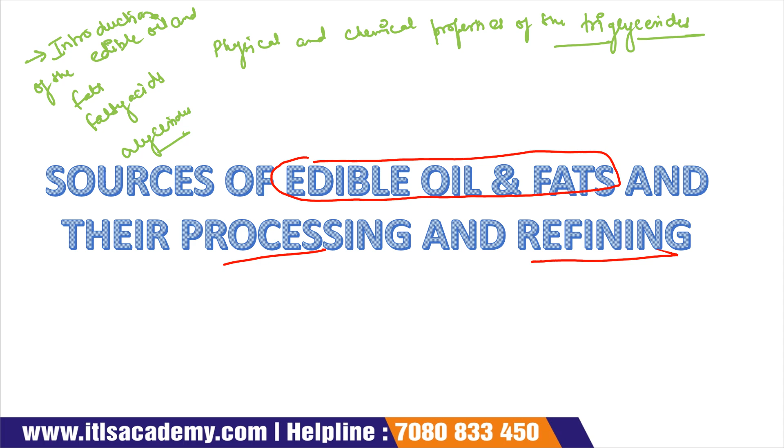Now in today's lecture, what are we going to do? We are going to see the sources of edible oil and fats, how we process this edible oil, and how we refine this edible oil and fat. All these things will be discussed in today's lecture. So let's start.

The first topic is sources of edible oil and fats. We all know that we get fat and oil from hundreds of plants and animals, and they can produce sufficient quantities of edible oil, but there are only a few sources which are commercially significant.

We will discuss a table which summarizes the major sources and different methods of processing edible oil and fat in different areas of the world. In table 4.8, all these things are summarized.

Several hundred plants and animals produce fats and oils in sufficient quantities to warrant processing into edible oil. However, only a few sources are commercially significant. There are several methods of producing this oil and fat, but among them only a few sources are commercially significant. In the next slide, there is a table which summarizes the major sources in the world and their methods of processing.

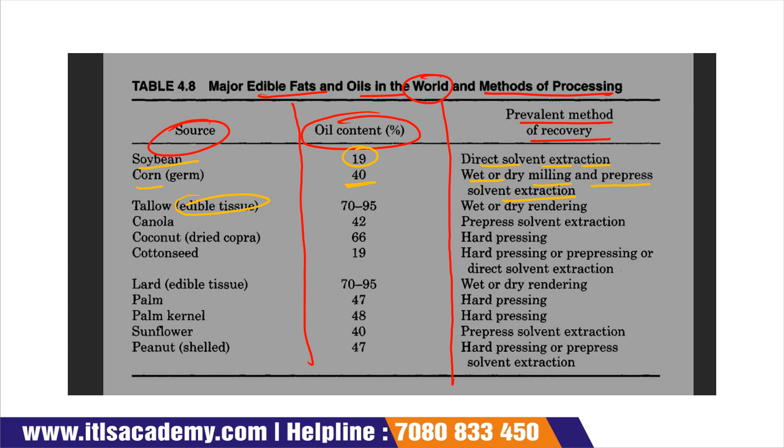The next source is tallow, which is edible tissue. It contains around 70 to 95% oil and can be recovered by the method called wet or dry rendering.

The next source is canola, which contains around 42% fat and can be recovered by the method called pre-press solvent extraction.

Next source is coconut, that is dried copra. It contains around 66% oil and can be recovered by the method called hard pressing. Next is cotton seed, which contains around 19% oil and can be recovered by hard pressing, pre-pressing, or direct solvent extraction.

The next source is lard, that is edible tissue. It contains around 70 to 95% oil and can be recovered by wet or dry rendering. Next source is palm, which contains around 47% oil and can be recovered by the method called hard pressing.

Next is palm kernel, which contains around 48% oil content and can be recovered by the method called hard pressing.

Next source is your sunflower, which contains around 40% oil and can be prepared by the pre-press solvent extraction method. Last source is your peanut, which contains around 47% oil and can be recovered by hard pressing or pre-press solvent extraction. So these are the major sources, their methods of processing, and the oil content present in them.

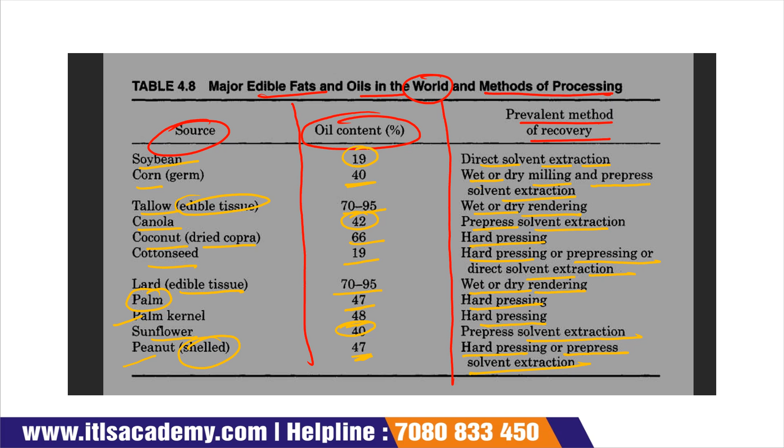It can be described in a summary. Now the next is world oilseed production. If we take data from 2003, world oilseed production is around 335.9 million tons. There is also a figure in the next slide, figure 4.2, which shows world production of different oil seeds.

Soybean constitutes the largest share, that is 56%, and the United States is the main crop grower. Malaysia mainly grows palm. The Philippines grow coconut, so coconut is the main oil source in the Philippines. China, Europe, India, and Canada grow rapeseed for oil production. Sunflower is grown in the United States, Australia, Europe, and Argentina, and the cottonseed market is dominated by the United States, China, Pakistan, India, and the former Soviet Union.

Now the next is world vegetable oil consumption. The previous one was oilseed production; now this is vegetable oil consumption. World vegetable oil consumption in 2003 was around 87.2 million tons. US consumption was about 9.91 million tons, and in the US market, animal fat such as tallow or lard has a relatively small share, only around 2%, compared to vegetable oil.

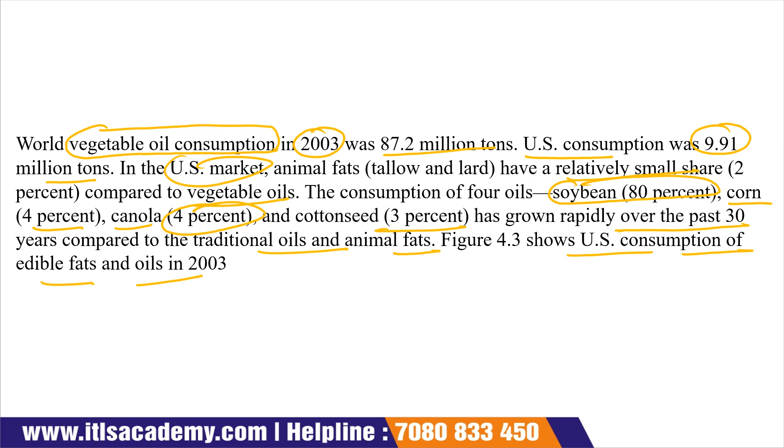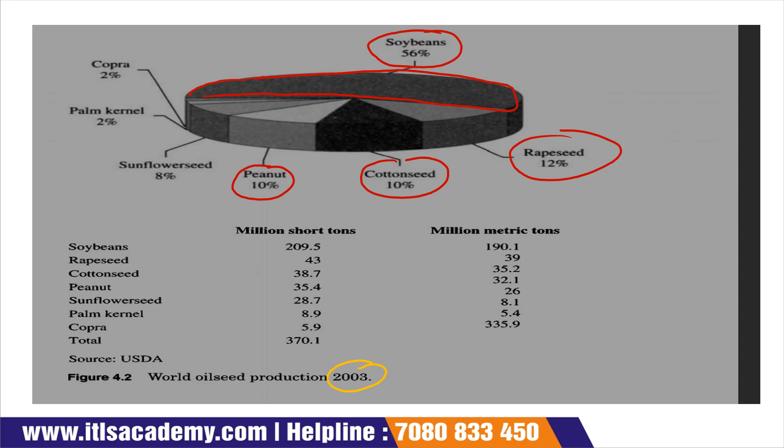Now the next is world oilseed production data from 2003. Here you see the major portion is covered by soybean, around 56%. Then rapeseed at 12%, cottonseed at 10%, peanut also at 10%, sunflower seed around 8%, palm kernel 2%, and copra 2%.

If we look at how much is produced in million short tons: soybean produces around 209.5 million short tons, or 190.1 million metric tons. Rapeseed produces 43 million short tons. Cottonseed produces 38.7 million short tons. Peanut produces 35.4 million tons. Sunflower seed produces around 28.7 million tons. Palm kernel produces around 8.9 million tons, and copra produces around 5.9 million tons. The total is around 370.1 million tons, and the source is from USDA.

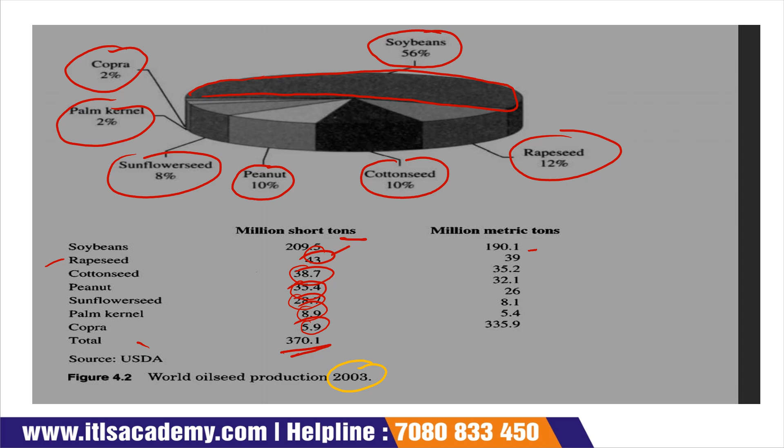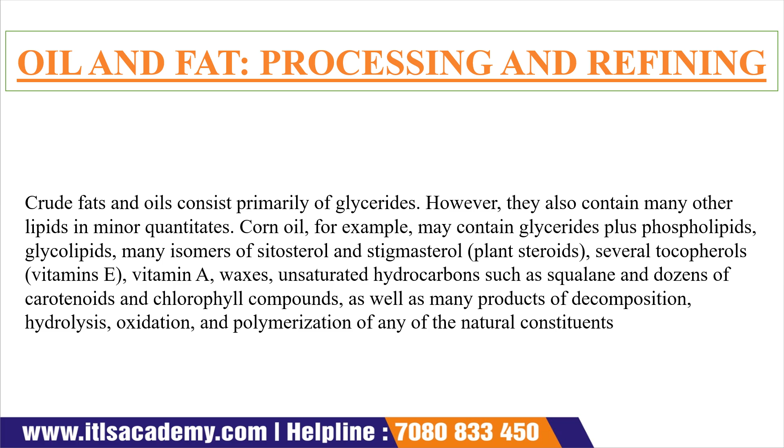Now the next is oil and fat processing and refining. After covering the sources of edible oil and fat, the next topic is oil and fat processing and refining. We know crude fat and oil consist primarily of glycerides. However, they also contain many other lipids, but in very minor quantities.

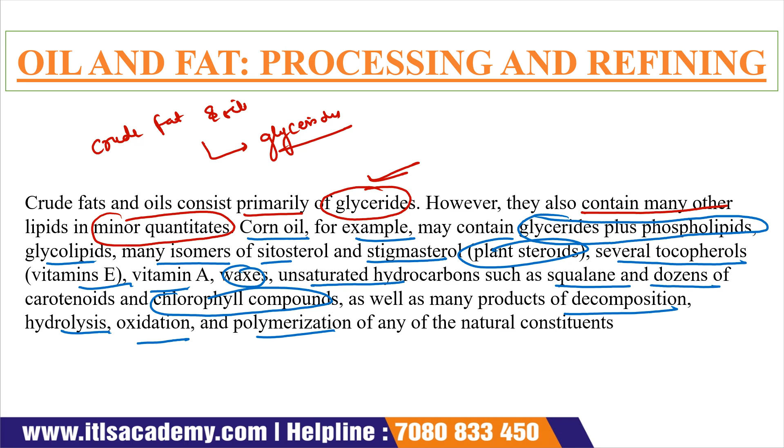For example, corn oil contains glycerides plus phospholipids, but the quantity of phospholipid is very small. It also contains glycolipids, many isomers such as sitosterol and stigmasterol, which are plant steroids, several tocopherols (vitamin E), vitamin A, waxes, unsaturated hydrocarbons such as squalene, and dozens of carotenoid and chlorophyll compounds, as well as many other products of decomposition like hydrolysis, oxidation, polymerization, or other natural constituents.

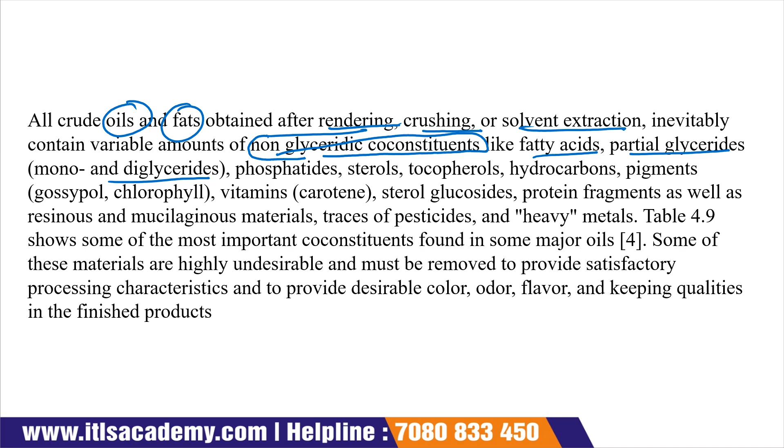All crude fats and oils, which are obtained after rendering, crushing, or solvent extraction, invariably contain a variable amount of non-glyceridic constituents such as fatty acids, partial glycerides called mono and diglycerides, phosphatides, sterols, tocopherols, hydrocarbons, pigments like chlorophyll, vitamins, carotene, sterol glucosides, protein fragments, as well as resins and mucilaginous material, traces of pesticides and heavy metals.

Table 4.9 shows the important constituents found in some major oils, and some of these materials are highly undesirable. These materials must be removed so that the oil will provide satisfactory processing characteristics, desirable color, odor, flavor, and maintain the quality of the finished product.

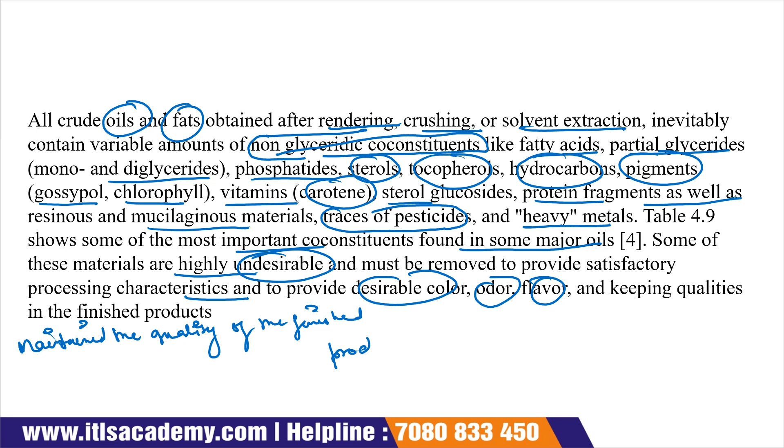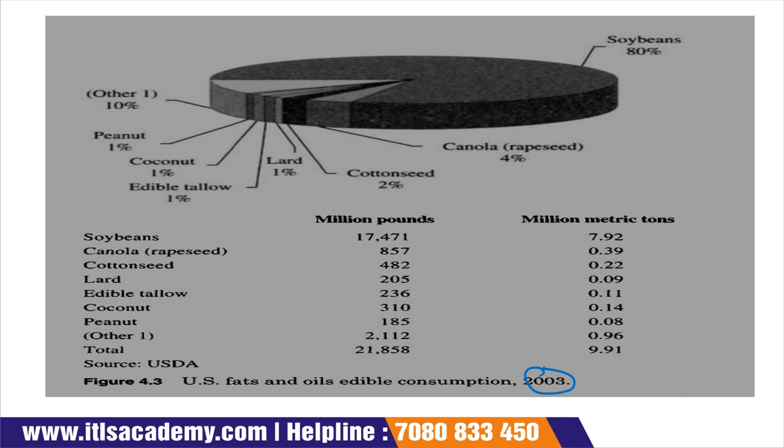Now the next is US fat and oil edible consumption according to 2003. Soybean contains 80%, canola 4%, cottonseed 2%, lard 1%, edible tallow 1%, coconut 1%, peanut 1%, and others 10%.

Now let's see how many million pounds of soybeans are produced, and how many million metric tons, with sources taken from USDA. Soybean is produced around 17,471 million pounds. Canola, that is rapeseed, produces around 857 million pounds.

Cottonseed is produced around 482 million pounds. Lard is produced around 205 million pounds. Edible tallow around 236 million pounds. Coconuts around 310 million pounds, and peanut around 185 million pounds. Others are produced around 2,112 million pounds, and the total is around 21,858 million pounds. Now the next is minor components in some major oils.

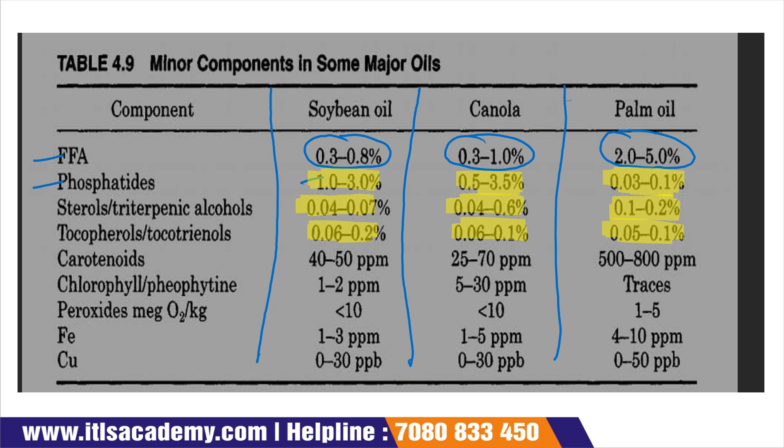The next is carotenoid. Present in soybean oil around 40 to 50 ppm, in canola 25 to 70 ppm, and in palm oil 500 to 800 ppm.

Next is chlorophyll and pheophytin. In soybean it is present around 1 to 2 ppm, in canola around 5 to 30 ppm, and in palm oil only traces are present.

The next is peroxide: less than 10 in soybean oil, less than 10 in canola oil, and 1 to 5 in palm oil.

Then iron and copper. Iron is present in soybean oil around 1 to 3 ppm, 1 to 5 ppm in canola, and 4 to 10 ppm in palm oil. Copper is present 0 to 30 ppb in soybean oil, 0 to 30 ppb in canola, and 0 to 50 ppb in palm oil.

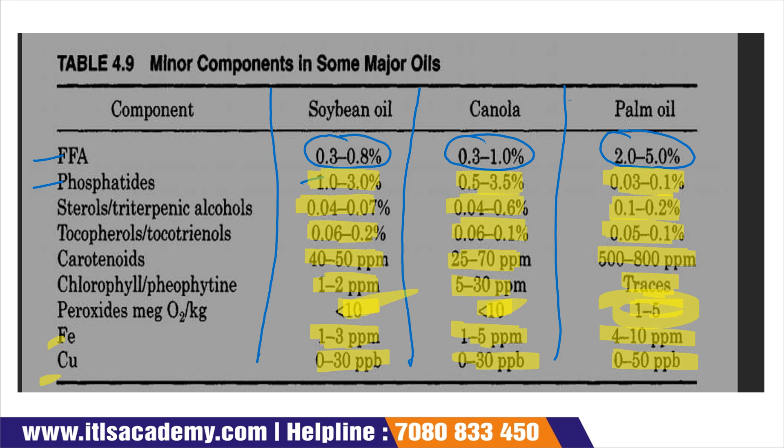So this is the minor components present in some major oils. Now the next slide: these objectionable constituents are removed during the refining process.

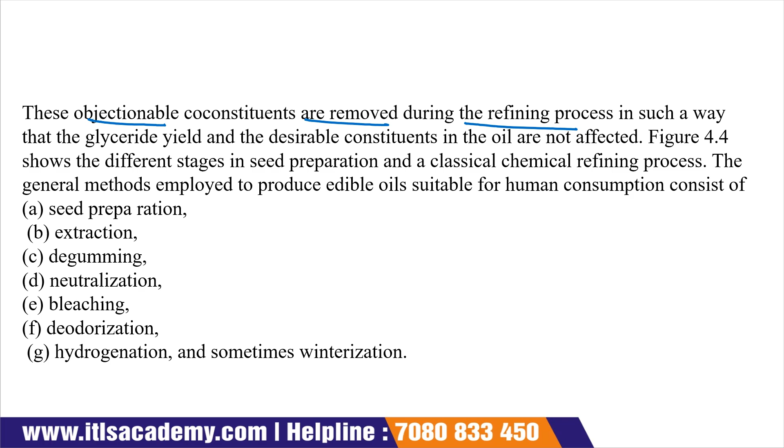When refining is performed after processing, the next step is refining. In the refining process, all the objectionable constituents are removed in such a way that the glyceride yield and desirable constituents in the oil are not affected. So when removing the objectionable constituents during refining, we have to take care that the glyceride yield and desirable constituents will not be affected.

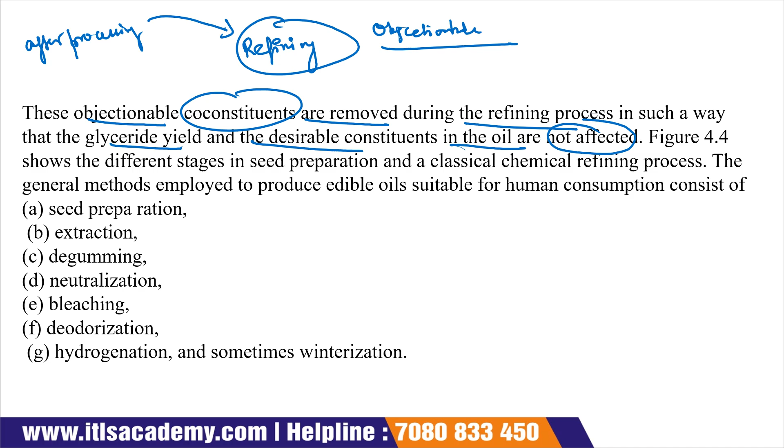Figure 4.4 shows the different stages in seed preparation and a classical chemical refining process. This figure will be presented in the next slide, showing the different stages of seed preparation and describing the classical chemical refining process. So the general method used to produce edible oil for human consumption consists of...

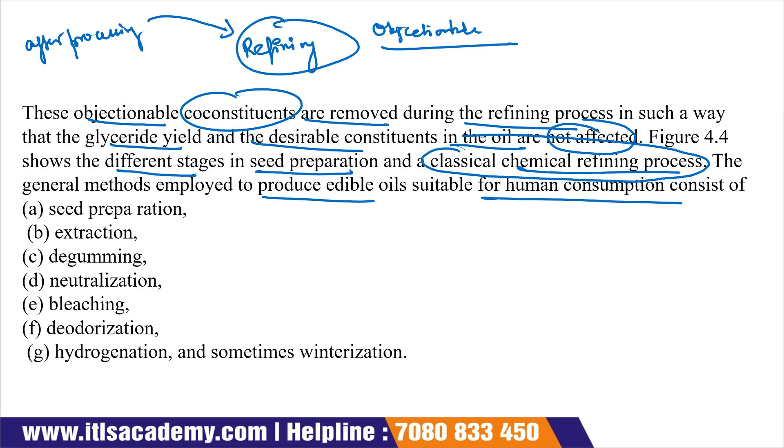So the first step is seed preparation, then extraction, then degumming, then neutralization, bleaching, deodorization, hydrogenation, and sometimes winterization. These are all the steps we are going to discuss in today's lecture. So there are 8 steps that we are going to discuss.

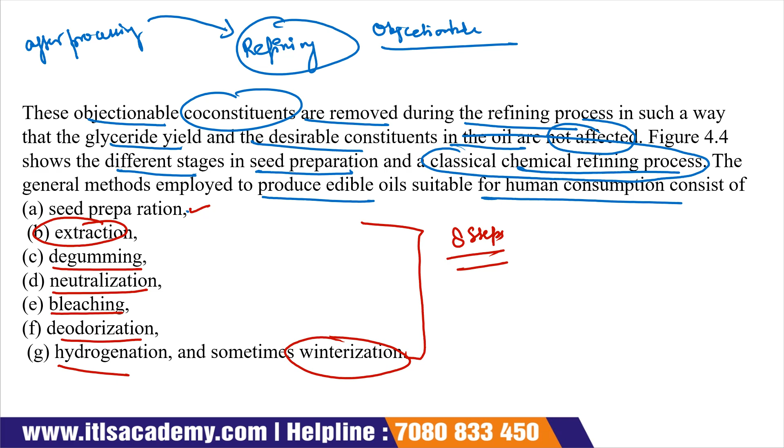So come to the next slide. This figure shows the essential steps in the extracting and refining of edible oil from an oil seed. First of all, we clean the dry oil seed.

Then after that, dehulling or deshelling is performed, then the seed is crushed to a pulp. When dehulling is performed, the hull or shells are removed, then it's crushed to a pulp.

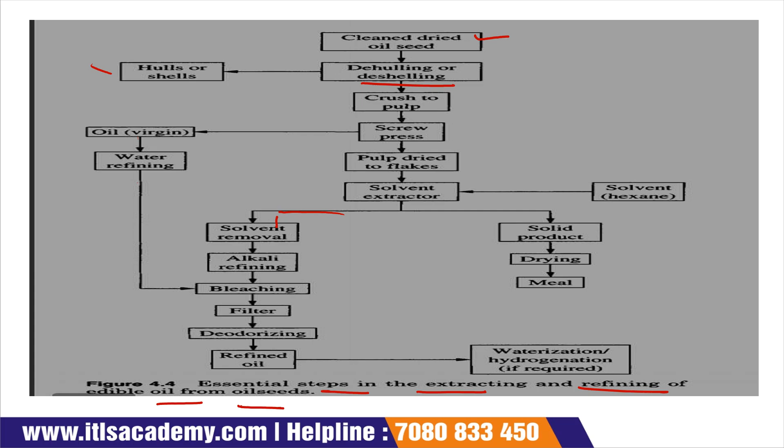After that, screw press is used, here oil, virgin oil and water refining takes place. Then pulp is dried to a flake. Then we perform solvent extraction, solvent removal, or get a solid product. If we get a solid product, then we dry it and use it as meal. Then solvent removal, alkali refining, bleaching, filtering, deodorization, refined oil, and this refined oil undergoes winterization and hydrogenation if required.

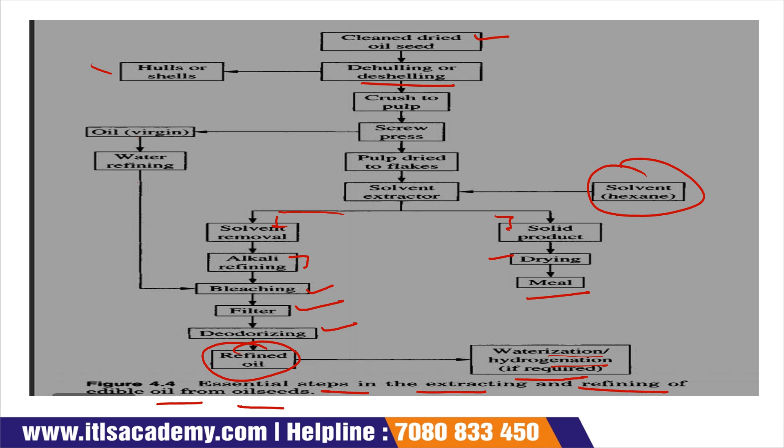In solvent extraction we use a solvent, that is solvent hexane. So these are the essential steps required when refining of edible oil from oil seeds is performed.

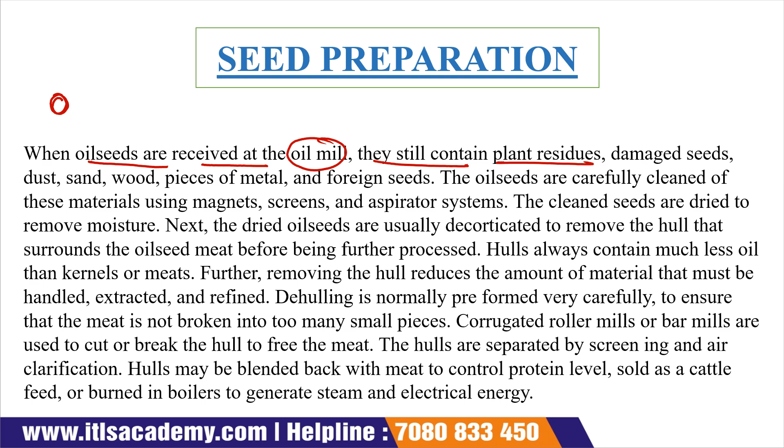Now the first one is seed preparation. When oil seeds are received at an oil mill, they still contain plant residue. Suppose this is your oil seed, received in an oil mill. Now it contains residue of the plant, along with damaged seeds, dust, sand, wood, pieces of metal, and foreign seeds.

The oil seeds are carefully cleaned of this material using a magnet, screens, and an aspirator system. For removing all this material which is not useful for oil preparation, we remove it with the help of either a magnet, screens, or an aspirator system. Then the clean seeds are dried so that it will remove the moisture.

Next, the dry oil seeds are usually decorticated so that it will remove the hull that surrounds the oil seed. If this is an oil seed, then a hull covers this oil seed, so we have to remove it before being further processed. The hull always contains much less oil than the kernel or meats, so the amount of oil is also less in the hull.

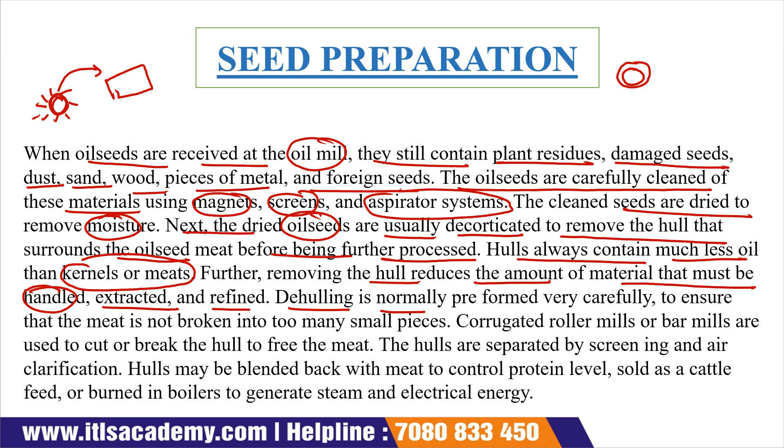Further removing the hull also reduces the amount of material that must be handled. When the hull is removed, the weight of the seed also decreases, reducing the amount of material we handle. Then it's extracted and refined. Dehulling is normally performed very carefully so that it ensures the meat is not broken into many small pieces. Corrugated roller mills or bar mills are used to cut or break the hull to free the meat.

The hulls are separated by screening and air clarification. Hulls may be blended back with the meat to control protein level, sold as cattle feed, or burned in a boiler to generate steam and electrical energy.

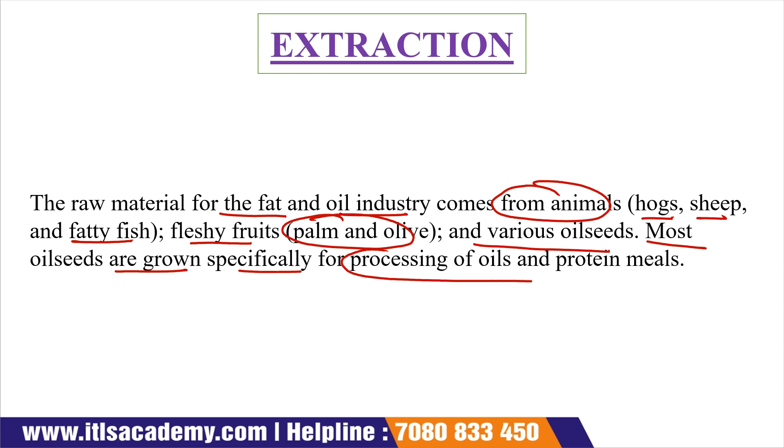Now the next step is extraction. The raw material for the fat and oil industry comes from animals, which may be hogs, sheep, and fatty fish, fleshy fruit such as palm or olive, and various oil seeds. Most oil seeds are grown especially for the processing of oil and protein meals.

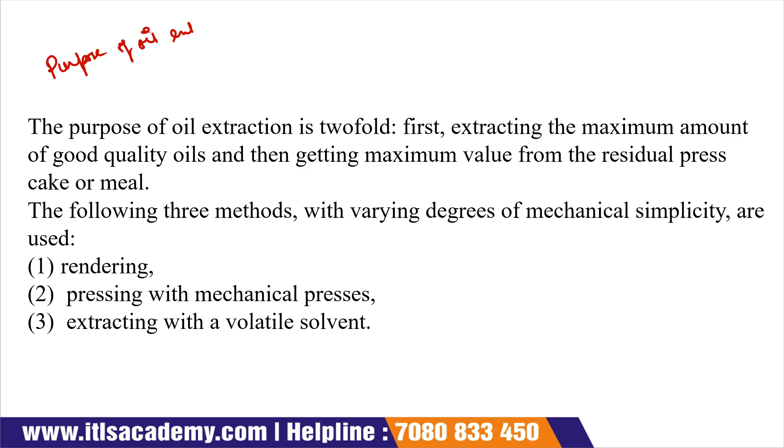Now the purpose of oil extraction is twofold. The first purpose is extracting the maximum amount of good quality oil. The second purpose is getting maximum value from the residual press cake or meal.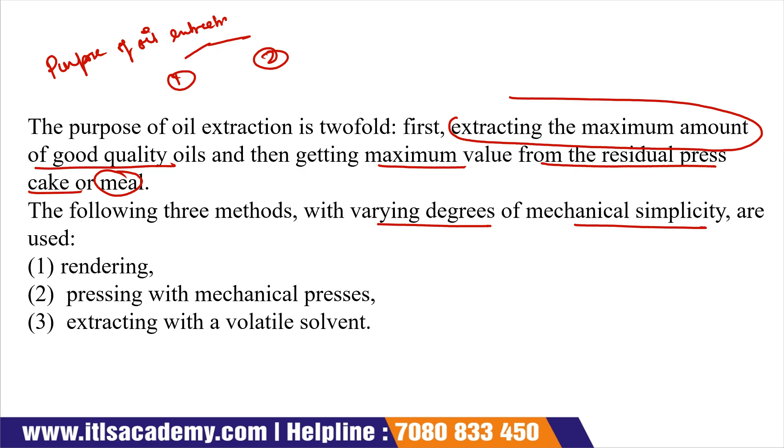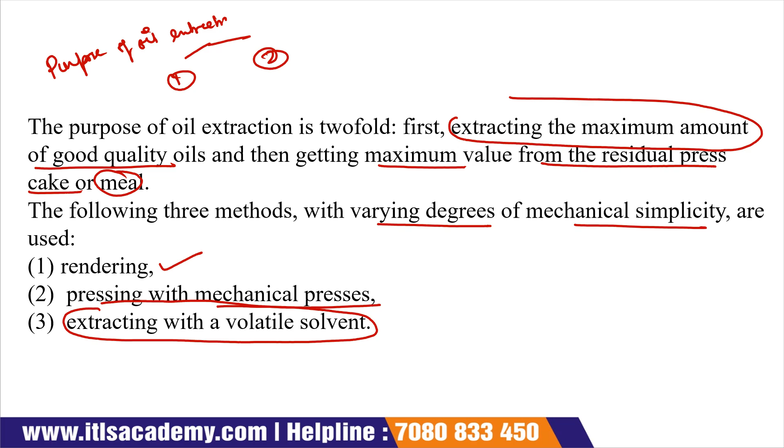There are three methods used for extraction with varying degrees of mechanical simplicity: rendering, pressing with a mechanical press, and extracting with a volatile solvent. Either we do rendering to get a maximum amount of good quality oil, or we press it with a mechanical press, or we extract it using a volatile solvent.

Now the next is rendering. Rendering is the process of extraction.

The rendering process is applied on a large scale to the production of animal fat. When we have to produce a large amount of animal fat, we use a rendering method for the production of tallow, lard, bone fat, and whale oil.

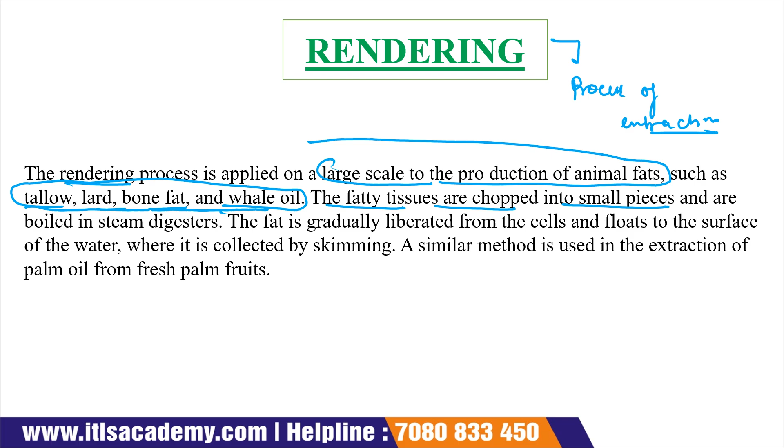The fatty tissue is chopped into small pieces and then boiled in a steam digester. The fat is gradually liberated from the cell and floats to the surface of the water, where it is collected by skimming. A similar method is used in the extraction of palm oil from fresh palm fruit.

Now the next is pressing, which is also a method of extraction. Oil seeds do not have fat cells like those of animals for storing fat. Instead, oil is stored in microscopic globules throughout the cell.

In these cases, rendering will not liberate the oil from the cellular structure, and the cell wall is broken only by grinding, flaking, rolling, or pressing. This pressing is done under high pressure so that it will liberate the oil.

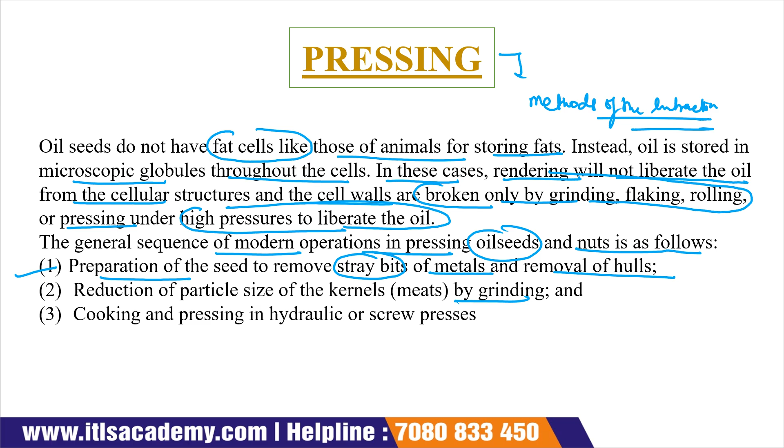The general sequence of modern operation in pressing oil seeds and nuts is as follows: first, preparation of the seed to remove stray bits of metal and hulls; second, reduction of the particle size of the kernel by grinding; and third, cooking and pressing in hydraulic or screw presses.

Efficient oil extraction by mechanical press is highly dependent on having correct preparation before pressing. If the preparation before pressing is not exact, then the amount of extraction obtained from the mechanical press will also decrease.

The extraction stage itself is carried out using a screw press, shown in figure 4.5. The press is fed by means of a variable speed conveyor within the feeder unit. The feeder regulates the flow of material into the press and thereby controls the loading on the press main motor. Oil is released along the length of the cage, which allows it to drain into the base of the press where it is collected.

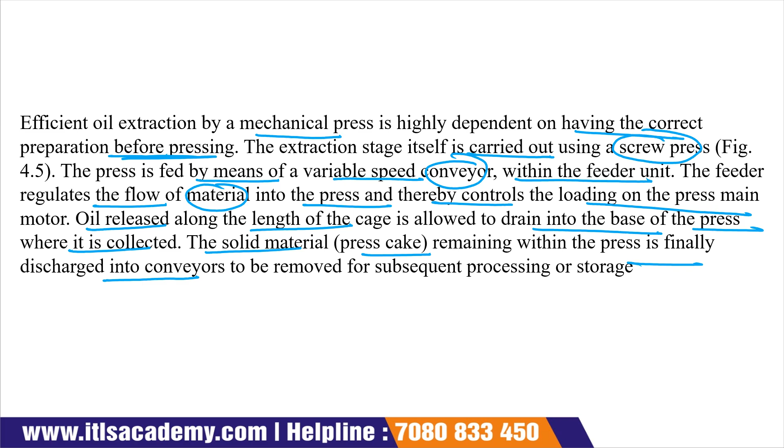The solid material remaining within the press, called press cake, is finally discharged onto a conveyor to be removed for subsequent processing or storage.

This is the screw press method. Here you add the feed, this is the cage, and here a screw presses the cage and oil is extracted. From the feed, only the press cake is removed from this side. Here the oil is collected and here the press cake is collected.

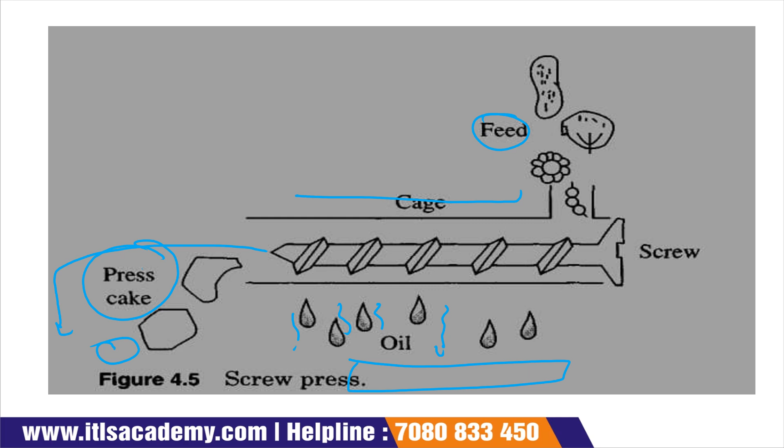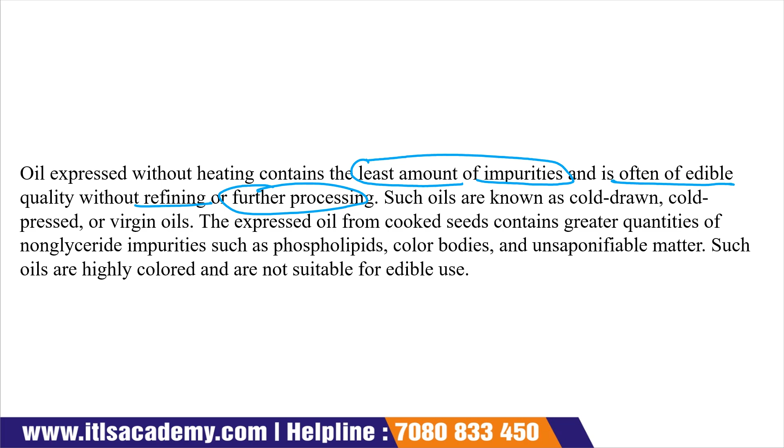Oil expressed without heating contains the least amount of impurities and is often of edible quality without refining or further processing. Such oils are known as cold drawn, cold press, or virgin oil, in which heat is not used.

The expressed oil from cooked seed contains greater quantities of non-glyceride impurities like phospholipids, color bodies, and unsaponifiable matter. Such oils are highly colored and are not suitable for edible use.

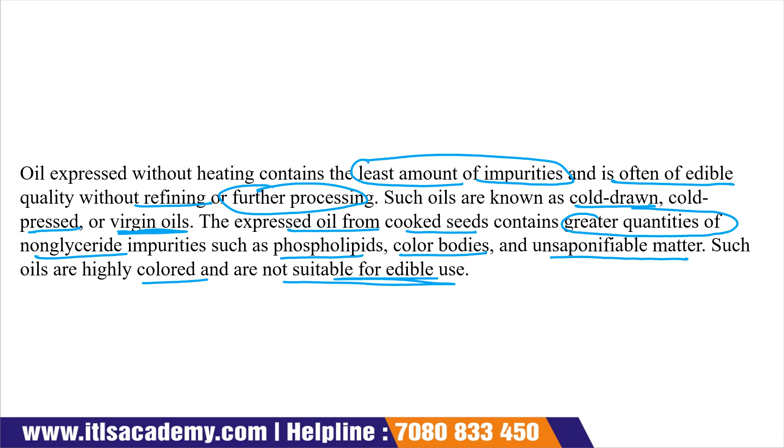Now the next is the solvent extraction method. The press cake emerging from a screw press still retains 3 to 15% of residual oil, which can be extracted with the help of solvent extraction. Here we use a solvent that has a greater tendency to bind with this oil and remove it from the feed, and then we evaporate the solvent to obtain only the oil.

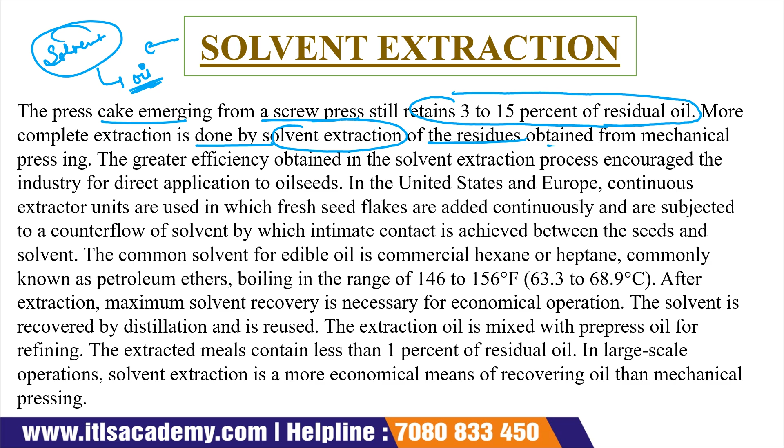More complete extraction is done by solvent extraction of the residue obtained from mechanical pressing, so that complete extraction can be achieved. Greater efficiency obtained in the solvent extraction process will encourage the industry toward direct application to oil seeds.

In the United States and Europe, continuous extraction units are used in which fresh seed flakes are added continuously and are subjected to a counter flow of solvent by which intimate contact is achieved between the seeds and the solvent.

So the common type of solvent used in case of edible oil is a commercial hexane or heptane, commonly known as petroleum ether, whose boiling range is between 146 to 156 Fahrenheit or 63.3 to 68.9 degrees Celsius.

After the extraction is done, maximum solvent recovery is important for economical operation. The solvent is recovered by distillation and can be reused. We evaporate or distill the solvent so it can be recovered and reused along with the oil. The extracted oil is mixed with pre-pressed oil for refining. The extracted meal also contains less than 1% residual oil. In large scale operations, solvent extraction is a more economical means of recovering oil than mechanical pressing.

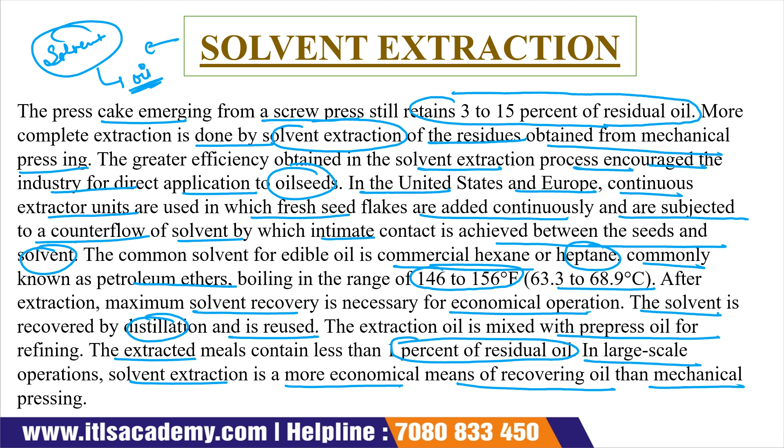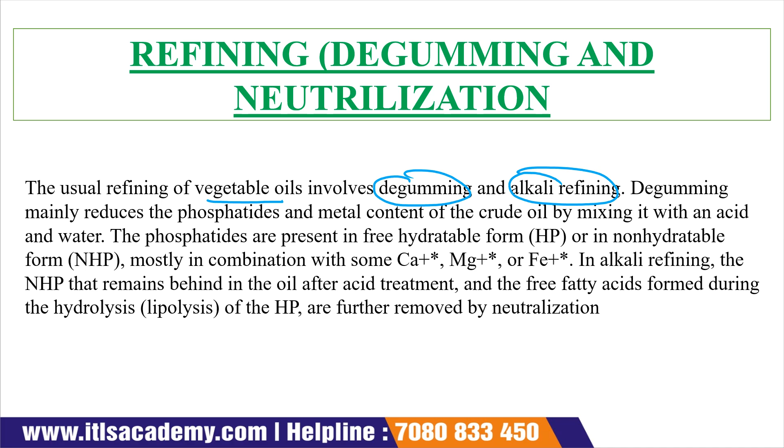Next is refining, degumming, and neutralization. The usual refining of vegetable oil involves degumming and alkali refining. If we have to refine the vegetable oil, it can be refined by degumming or alkali refining. Degumming mainly reduces the phosphatides and metal content of the crude oil by mixing it with an acid and water.

Phosphatides are present in a free hydratable form, called HP, or in a non-hydratable form, called NHP, and also present in combination with metal ions such as calcium, magnesium, or iron. In alkali refining, the non-hydratable form of phosphatides remain behind in the oil after acid treatment, and the free fatty acid formed during hydrolysis, that is lipolysis of the HP, is further removed by neutralization.

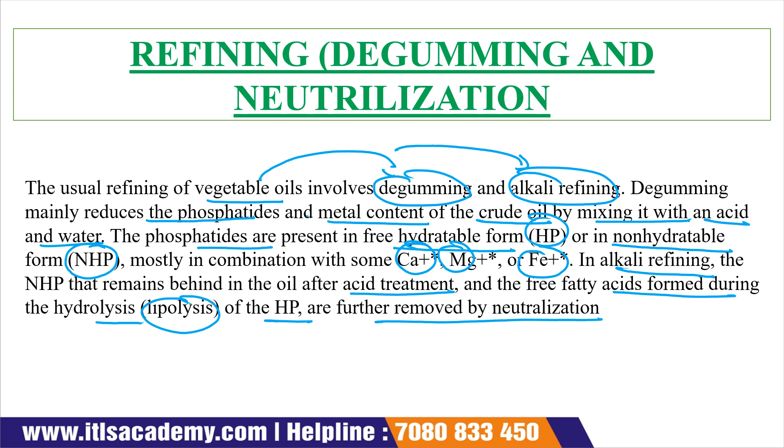Degumming also consists of treating the oil with a small amount, around 0.05%, of concentrated phosphoric acid and water, followed by centrifugal separation of the coagulated material, that is lecithin. This process is applied to many oils, such as soybean oil, which contains phospholipids in significant amount. Then refining with alkali removes free fatty acids formed during lipolysis of the fat or oil before rendering or extraction.

Then this oil is treated again with an excess amount of caustic soda, around 0.1%, and the mixture is heated at 75 degrees Celsius so that it can break the emulsion if one is formed. The mixture is allowed to settle, and the settling is called foots. When we allow the mixture to settle, it is called foots, and it is collected and sold as soap stock. In a continuous system, the emulsion is separated with a centrifuge.

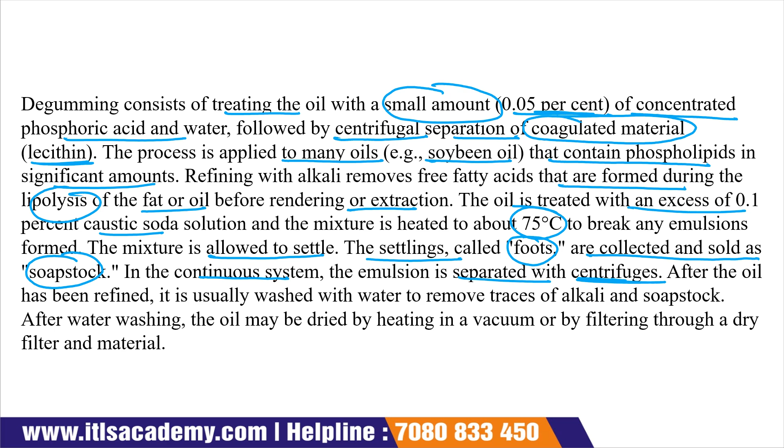After the oil has been refined, it is usually washed with water to remove traces of alkali and soap stock. After water washing, the oil may be dried by heating in a vacuum or by filtering through a dry filter material.

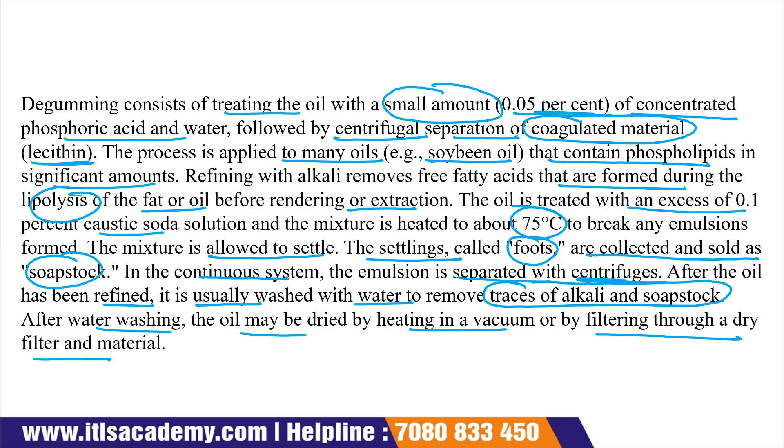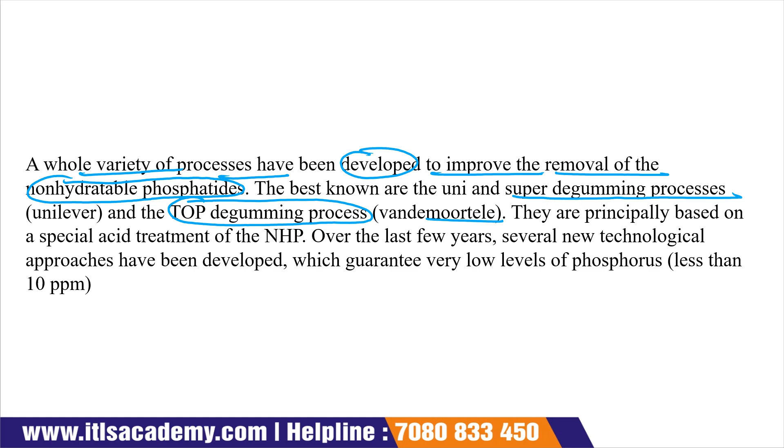A whole variety of processes have been developed to improve the removal of non-hydratable phosphatides. The best known are the Uni and Super degumming processes from Unilever, and the Top degumming process from Vandemoortele. These are principally based on a special type of acid treatment of the NHP. Over the last few years, several new technologies and approaches have been developed which guarantee very low levels of phosphorus, less than around 10 ppm.

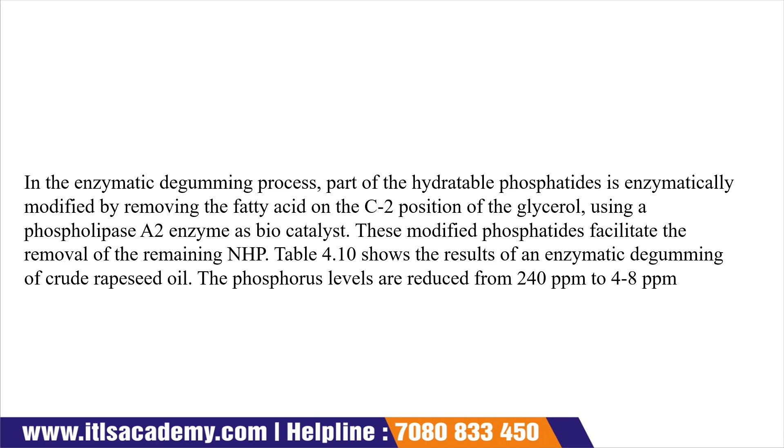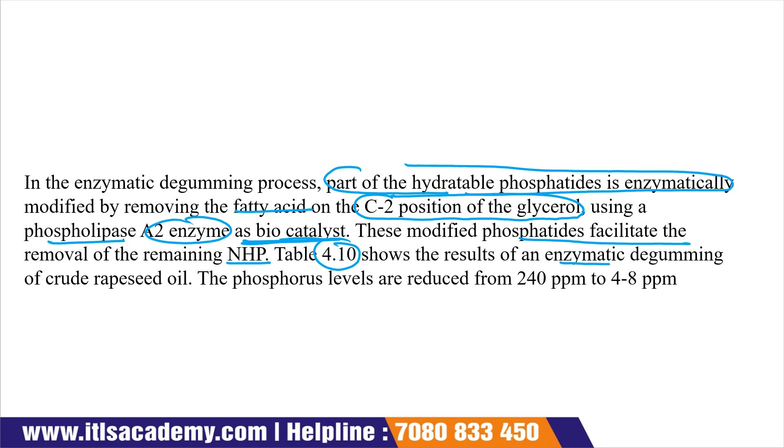In the enzymatic degumming process, a part of the hydratable phosphatides is enzymatically modified to remove the fatty acid at the carbon number 2 position of the glycerol by using phospholipase A2 enzyme as a biocatalyst. These modified phosphatides facilitate the removal of the remaining NHP. Table 4.10 shows the results of enzymatic degumming of crude rapeseed oil, where the phosphorus level is reduced from 240 ppm to 4 to 8 ppm.

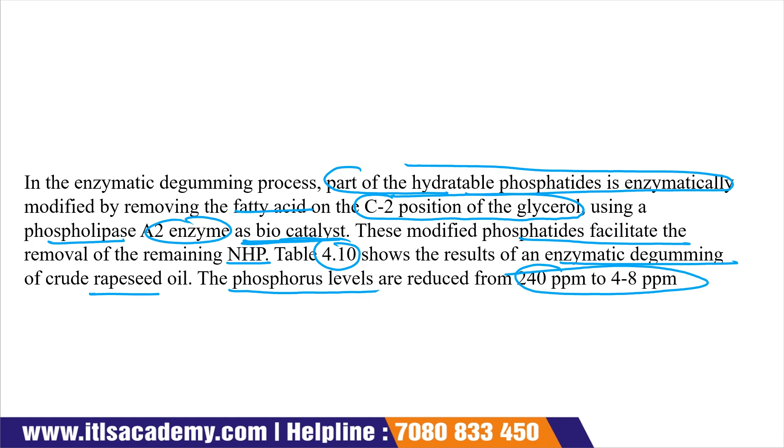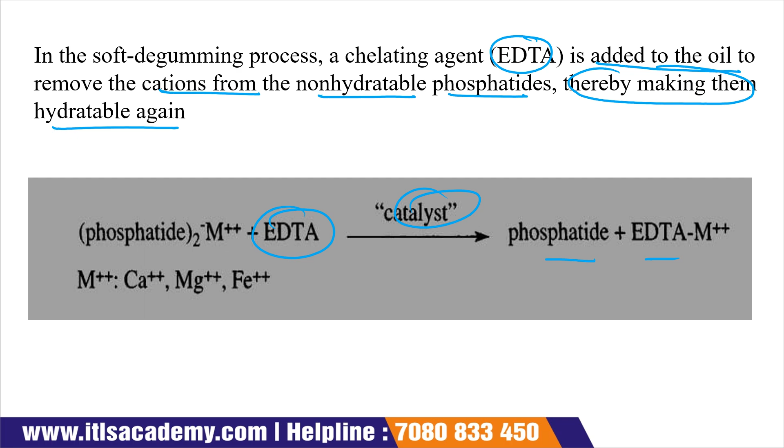Now, if the soft degumming process is occurred, then the chelating agent, that is your EDTA, is added to the oil to remove the cations. It removes the cation from a non-hydratable phosphatide, thereby making them hydratable again. So here this is your phosphatide, this is your EDTA catalyst, then phosphatide-EDTA, this is your metal ion, that is your calcium ion, magnesium ion, and ferrous ion.

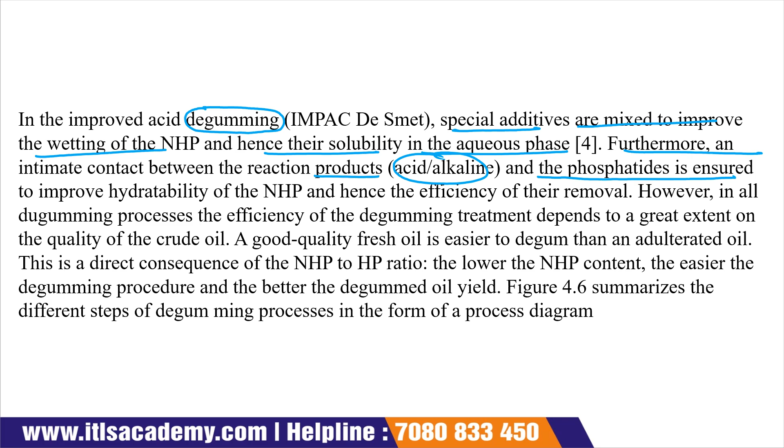Now, in the improved acid degumming, special type of additives are used and mixed into it so that it will improve the wetting of the NHP and hence their solubility in the aqueous phase. Furthermore, an intimate contact between the reaction product, that is your acid or alkaline, and the phosphatide also ensures that it will improve the hydratability of the NHP, and also the efficiency of their removal.

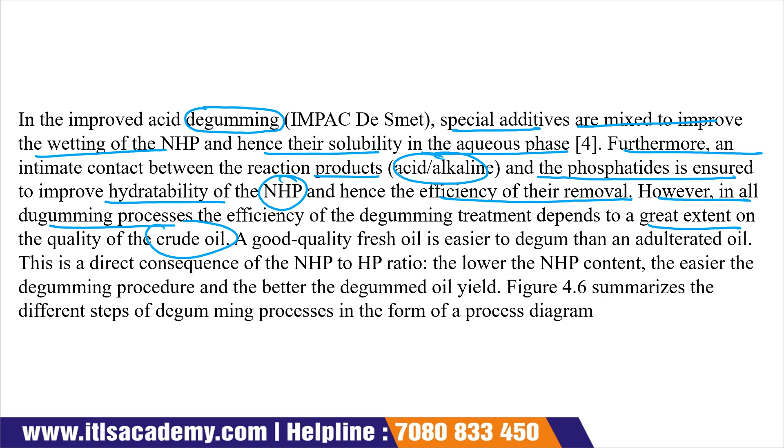However, in all degumming processes, the efficiency of the degumming treatment depends to a great extent on the quality of the crude oil. A good quality fresh oil is easier to degum than an adulterated oil. If we have a fresh oil or good quality oil, then the degumming process is easier compared to the degumming of adulterated oil. The direct consequence is the NHP to HP ratio: the lower the NHP content, the easier the degumming process.

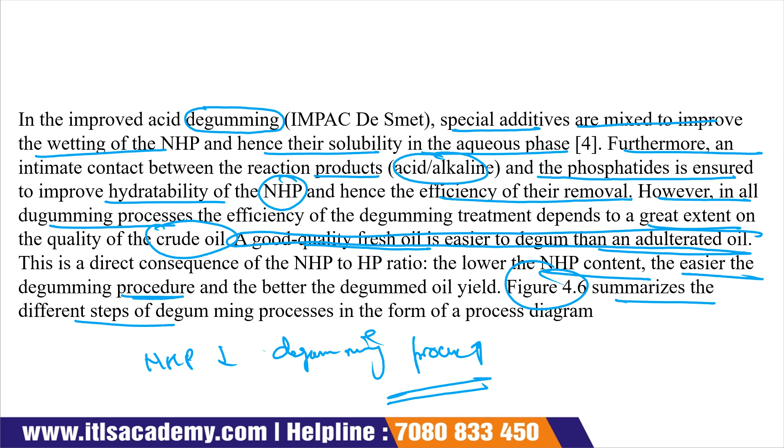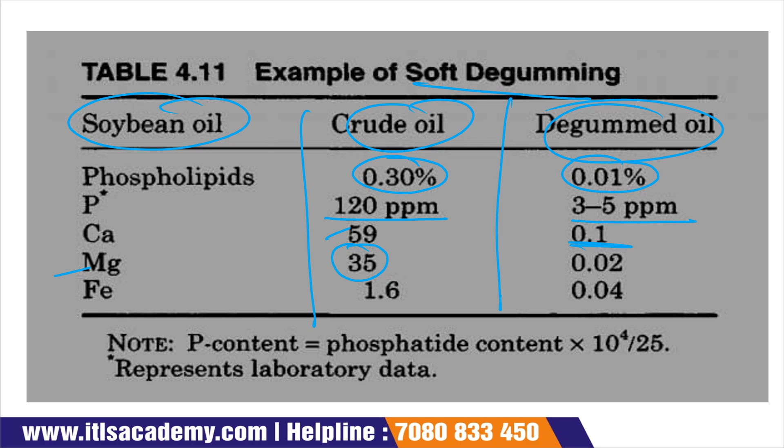Figure 4.6 also summarizes the different steps of the degumming process in the form of a process diagram. Here is an example of soft degumming for soybean oil: crude oil to degummed oil. Phospholipids in crude oil are present around 0.30%, in degummed oil around 0.01%. Phosphorus is 120 ppm in crude oil, and in degummed oil around 3 to 5 ppm. Calcium ion present in crude oil is around 59, and in degummed oil around 0.1 ppm. Magnesium ion is present around 35 ppm in crude oil, and in degummed oil around 0.02 ppm. Iron is present around 1.6 ppm in crude oil, and in degummed oil around 0.04 ppm.

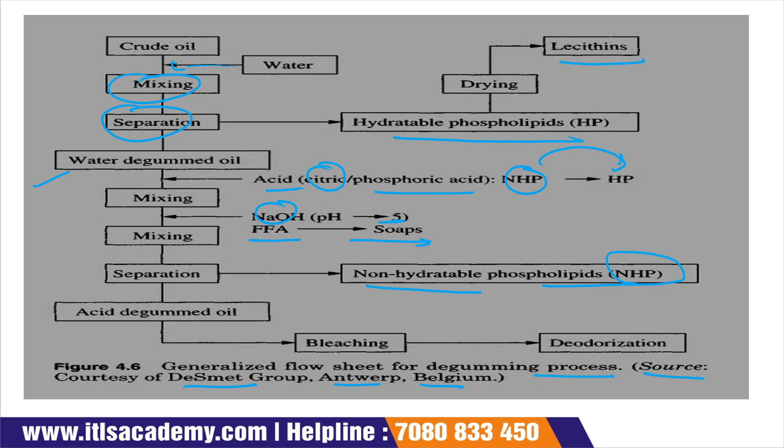Now the next is the generalized flow sheet for the degumming process, and the source of that diagram is courtesy of DeSmet Group, Antwerp, Belgium. Here is your crude oil: water is added, mixing, then separation. During separation, hydratable phospholipids are obtained, then drying, lecithin. Again water degumming, mixing, then we add an acid like citric acid or phosphoric acid. NHP are converted into HP, again mixing, and during mixing we add NaOH at pH 5. Here free fatty acids are removed in the form of soap. Then separation, during which we get non-hydratable phospholipid, that is your NHP, and then acid degumming oil, then bleaching, then deodorization. So this is the process.

Now the next is bleaching. The refined oil is usually dark in color owing to the presence of some pigmented material. When we have a refined oil, it is usually dark in color because of the presence of pigmented material like chlorophyll, carotenoids, and minor impurities like residual phosphatides, soaps, metals, and oxidation products. Bleaching also reduces the color by adsorbing these colorants on the bleaching earth, or also activated charcoal, or both. So in addition to decolorization, bleach clay also adsorbs the suspended matter and minor impurities.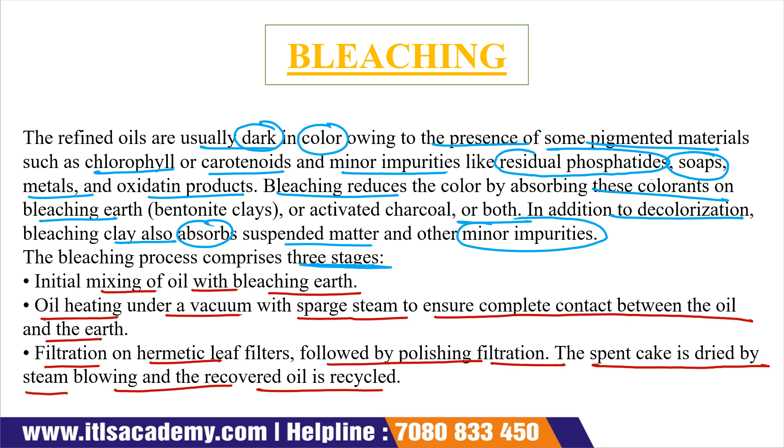This bleaching process involves three stages or three steps. The first step is initial mixing of oil with bleaching earth. Next is oil heating under vacuum with sparge steam, so that it ensures complete contact between the oil and the earth. The third one is filtration, on hermetic leaf filter, followed by polishing filtration. The spent cake is dried by steam blowing, and the oil is recovered and recycled.

Bleaching is by far the most expensive process in refining in terms of utility cost. The relatively high cost of bleaching clay, as well as the oil-in-earth losses and the bleaching adsorbent disposal cost, largely affect the operating cost of the bleaching plant. Moreover, the ever stronger environmental regulations are now forcing oil refiners to drastically reduce mainly the solid waste, as these are difficult to treat. Now several bleaching processes have been developed over the years to limit the consumption of bleaching earth. Figure 4.7 shows the flow sheet of a double batch bleaching process.

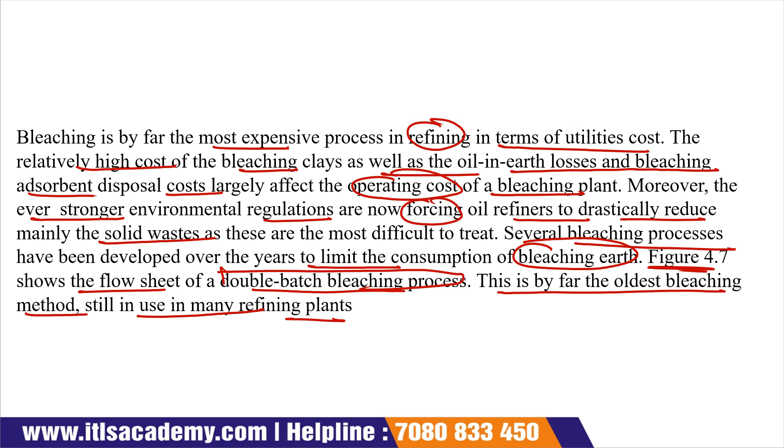In order to reduce the bleaching earth consumption, alternative new multi-step processes have been developed. After the double bleaching method, the multi-step bleaching method was introduced so that it reduces the bleaching earth consumption.

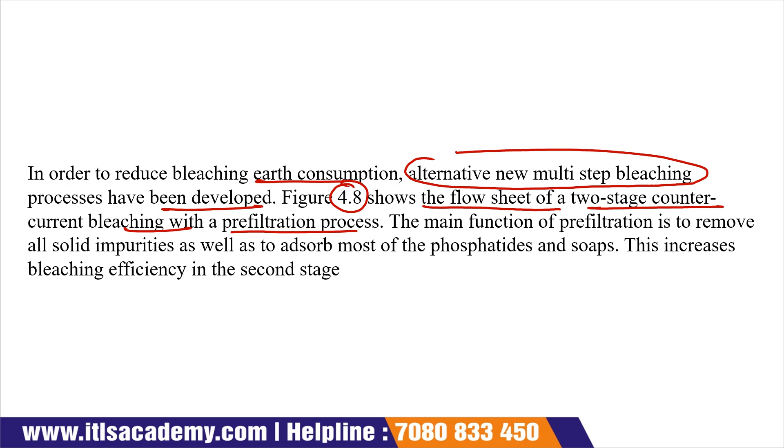This figure, 4.8, shows the flow sheet of a two-stage counter current bleaching with a pre-filtration process. The main function of the pre-filtration is to remove all the solid impurities as well as adsorb most of the phosphatides and the soap. This increases the bleaching efficiency in the second stage.

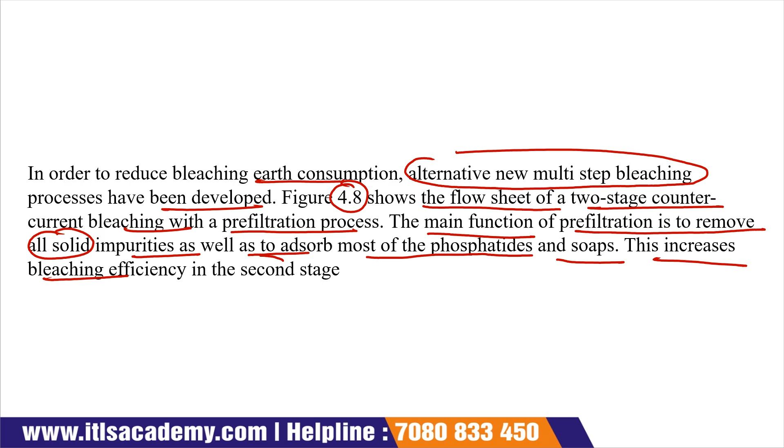So this diagram shows the two stage counter current bleaching with pre-filtration: vacuum, pre-filtration, bleaching earth dosing, final bleaching, final filtration, then a bleach safety filter.

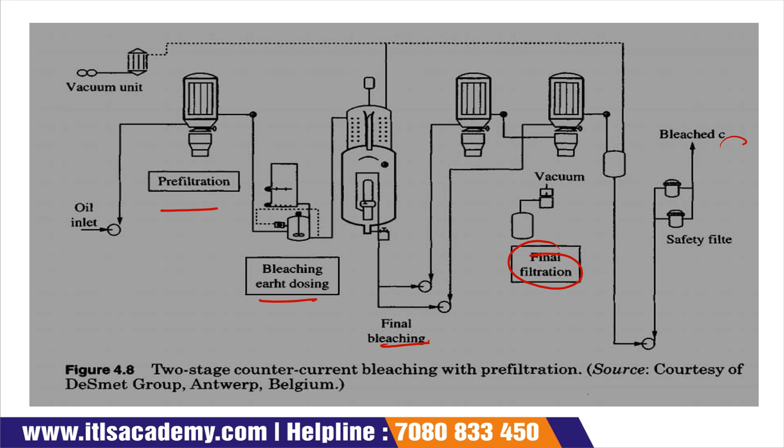The next step is deodorization. Most fats and oils, even after refining, have a characteristic flavor and odor owing to the presence of minor amounts of free fatty acid, aldehydes, ketones, and other compounds. The concentration of these undesirable substances found in most oils is low, around 0.2 to 0.5%.

The removal of these undesirable substances depends upon the vapor pressure of the different minor compounds and the deodorization conditions, that is temperature, pressure, residence time, amount of stripping steam, and the geometry of the vessels.

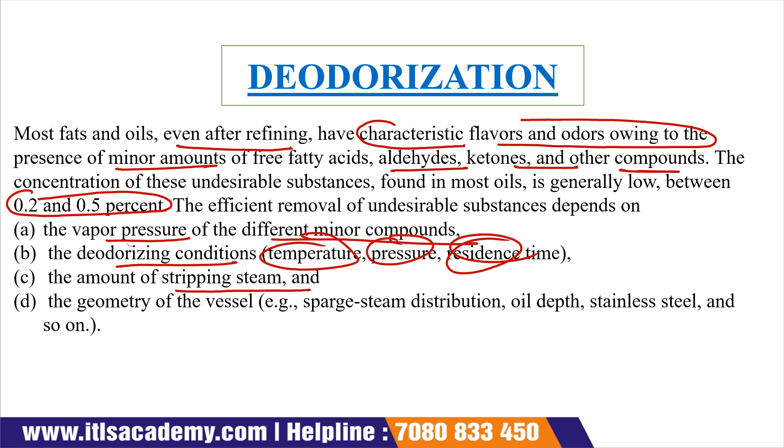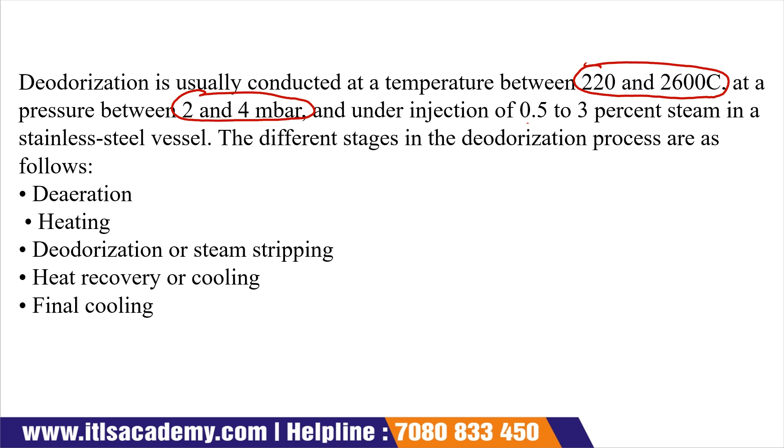Deodorization is usually conducted at a temperature range of 220 to 260 degrees Celsius and a pressure between 2 and 4 mbar, under injection of 0.5 to 3% steam, in stainless steel equipment.

The different stages in a deodorization process are: deaeration, heating, deodorization or steam stripping, heat recovery or cooling, and final cooling.

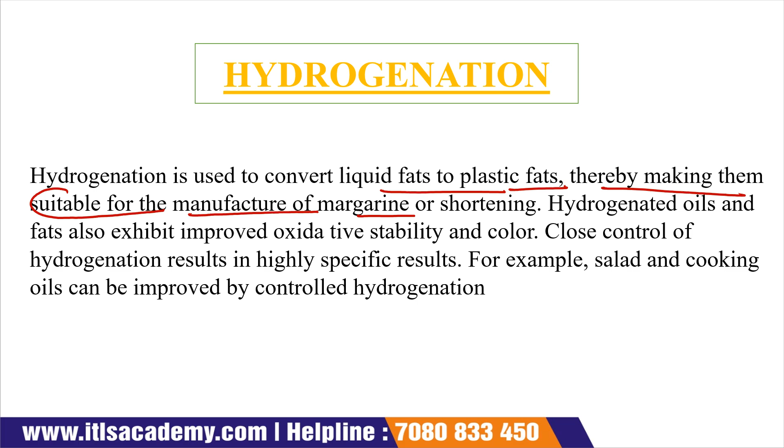Hydrogenation is used to convert liquid fat into a plastic fat, thereby making it suitable for the manufacturing of margarine or shortening. This hydrogenation process is important for the manufacturing of margarine or shortening.

Hydrogenated oil and fat also exhibit improved oxidative stability and color. Close control of the hydrogenation results in highly specific results. For example, salad and cooking oil can be improved by controlled hydrogenation.

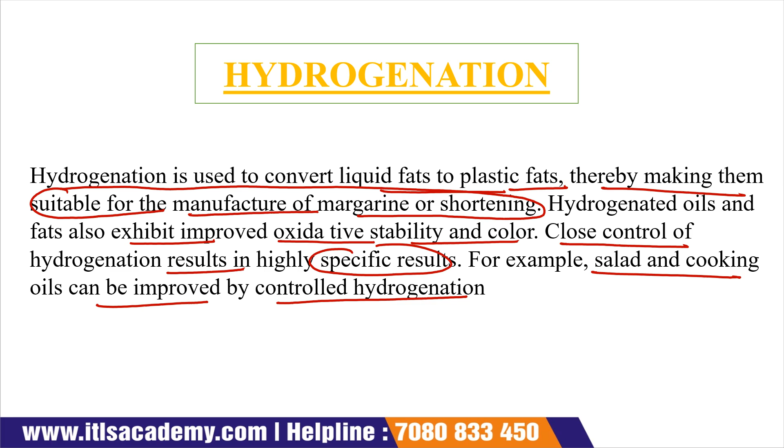Next is winterization. Winterization is another operation that consists of removing from certain oils the components that solidify at low temperature, which are therefore sources of turbidity or settling in a bottle.

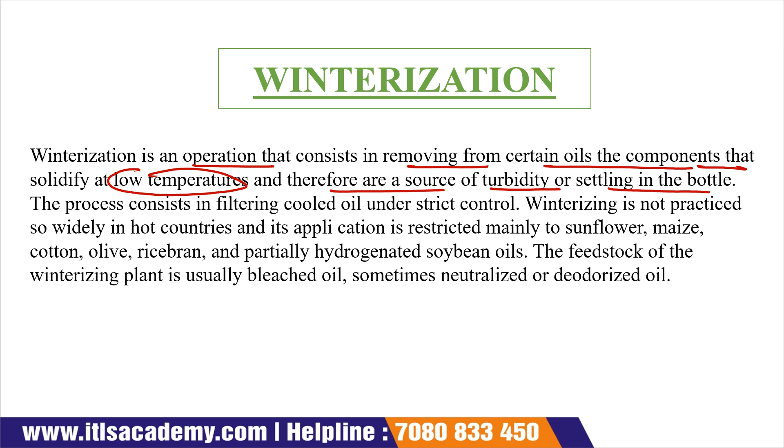The process consists of filtering cooled oil under strict control. Winterizing is not practiced so widely in hot countries, and its application is restricted mainly to sunflower, maize, cotton, olive, rice bran, and partially hydrogenated soybean oil. The feedstock of the winterizing plant is usually bleached oil, sometimes neutralized or deodorized oil.

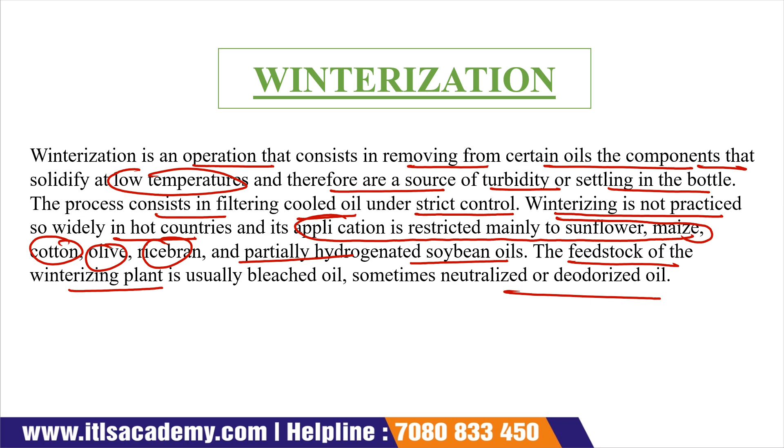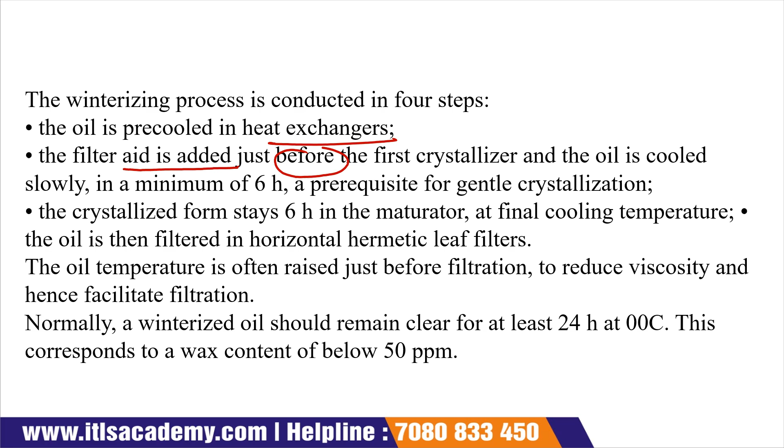Winterizing process is completed in four steps. First, oil is pre-cooled in a heat exchanger. Filter aid is added just before the first crystallizer and the oil is cooled slowly over a minimum of 6 hours, a prerequisite for gentle crystallization.

The crystallized form stays 6 hours in a maturator at final cooling temperature. Then the oil is filtered in a horizontal hermetic leaf filter. Oil temperature is often raised just before filtration so that it reduces the viscosity and facilitates the filtration.

Normally, winterized oil remains clear for at least 24 hours at 0 degrees Celsius, corresponding to a wax content below 50 ppm.

So this is all about the different sources of edible oil and fats, and also about the processing and refining of oils and fats. I hope you will understand.